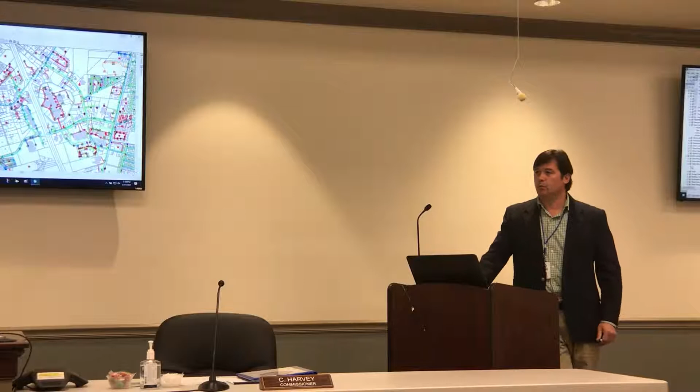I thought we were tying this person on to sewer also though. No sir, not at this time. I just thought- it's a water and sewer easement. We were able to obtain that from the property owners, both a water and sewer easement, but at this time it's only a water extension. Okay, my apologies on that.

Well, just a follow-up question for clarity. At such time 507, that's the closest to our gravity system, wants to connect, will they be connecting via gravity, or would they have a grinder pump?

They would have a grinder pump. Theoretically there'd be a 2-inch force main that runs parallel to the 2-inch water main that they tie onto. Because if not, they would have an excessively long lateral out in the public right-of-way. Understood. Okay, and then let's say 509 goes next.

Do we run the line down the right-of-way, that low-pressure system along the frontage of 509, at such time that they put in a grinder pump? I think that's going to be a new house, I presume. There's an existing structure down there, I can't tell if they're renovating or if there's an existing structure at 509.

Is this the drawing on the second sheet, Todd, that we're supposed to be looking at? We used a previously created plat as the exhibit for obtaining the easements for folks, so this is the only one related to Longview as far as the drawing. I've got GIS pulled up, so it'll help us get a better view. Let me turn on the ortho.

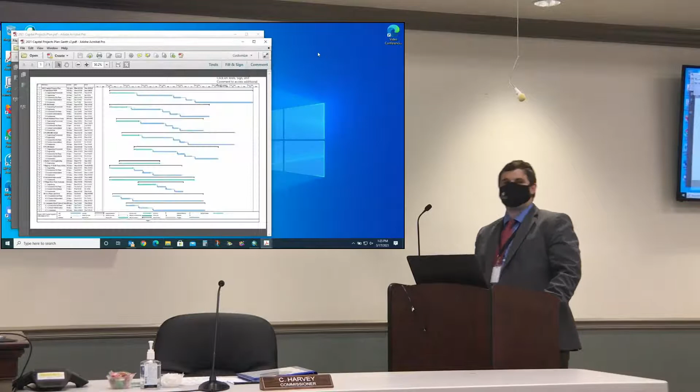Are we supposed to be looking at the new one or the old one? We're going to go over both of them, give you a lot of options today. I have a third option that's not printed on here either, so.

What was sent out to y'all last week, this is the draft capital projects plan for the 2021 year, starting with the fiscal year. The reason it's a draft is because we typically approve this concurrent with the annual budget. And since we do not have an approved budget for next year yet, these have not been approved. So, we talked about most of these at the retreat that we had back in January.

These projects are in a variety of areas. The budget, which will be presented at the Finance Committee meeting, currently has about $7 million in the R&R fund for next year. So down there at your bottom right, you'll see the R&R funded projects for next year would be just shy of $7 million.

Those projects would be to convert the Canal Road water production facility, the fire well, to a water production facility. That is right there by the intersection of Glencoe and Canal and Harry Driggers. We have been in communications with Glynn County for their proposed intersection project there, and this is being taken into account with their design. We would convert that from a fire well to a production well, exactly like we did with Ridgewood. That is an Upper Floridan well.

And we also have a great deal of demand currently ongoing. Do you need this email open anymore? No, no, you switch users. Okay, good.

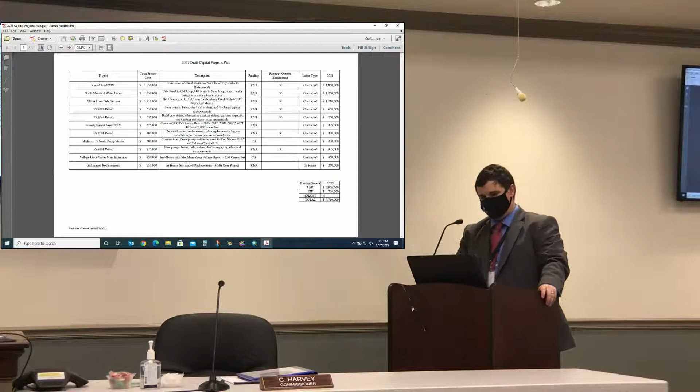If you're familiar with the exit 38 area, you'll notice every time we have a major water break there, we cut the entire exit off of water because it's not looped very well. It is single fed all the way from Old Jesup to the spur and up almost to Perry Lane Road. So if we have to shut a valve down, pretty much everything between the spur and Old Jesup gets shut down. The easiest way to loop that would be down Hautala, but that's a bit of a spaghetti junction with utilities out there right now, and you could theoretically jack and bore the railroad, but that's about a 600-foot bore.

Jack and bore costs right there, so that's about $350,000 to bore that. So the options we're looking at here are Cate Road to Old Jesup. Since you did me a favor and pulled up GIS, tell us where that line's going to be. I did not produce maps for all these because I was planning just to pull up GIS.

Can you provide a map that goes in the packet tomorrow? This is going to be in the packet tomorrow, right? No, sir, this is just for discussion today. Okay, it would theoretically be in your packet for approval at the April meeting.

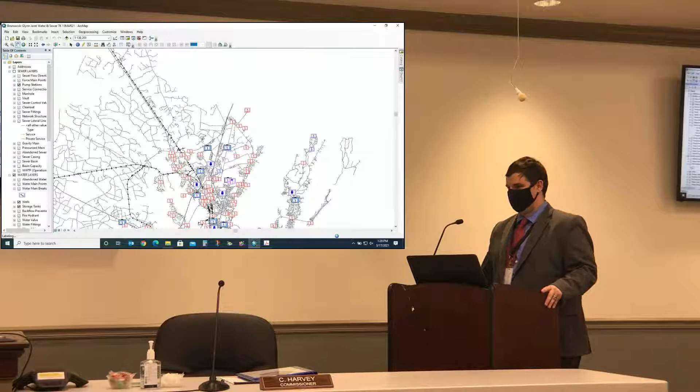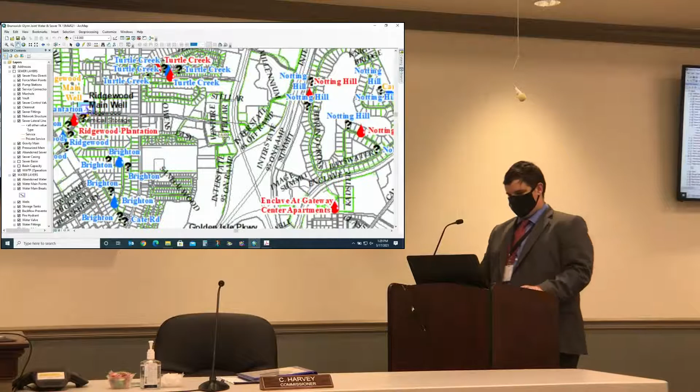So we're up here, let's zoom in on our exit. One of the sections we're looking at for looping this, as you can see, we have a line that comes across the interstate up here to our right and comes down through Millennium Park at the I-95 Toyota, but it is not looped to the other side of the spur.

So one of the loops we'd be looking at doing would be getting GDOT permitting to bore under the spur and loop those in there. Because if you look down here, what currently happens, this long blue line keeps following and then dead ends right at the railroad. So if there's a valve break anywhere back here, the closest place we can shut that off is back here, so we shut off everybody in between that feeds off of that line. Ridgewood has helped that somewhat, but we still have problems. The other area we're looking at is back behind the Tractor Supply, which I'll get to shortly.

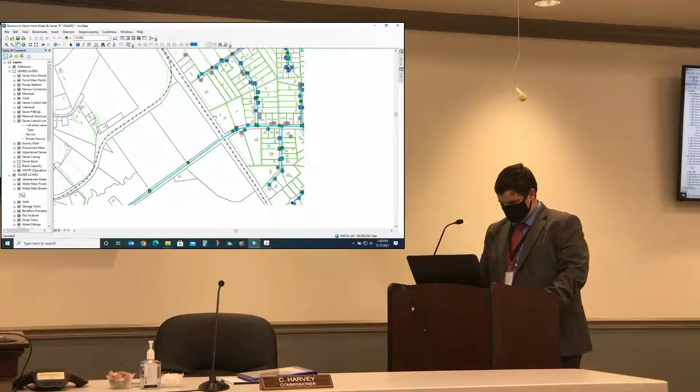Looking for road names here - that's 99, went too far. Some road names here, that's Ridgewood, Perry Lane.

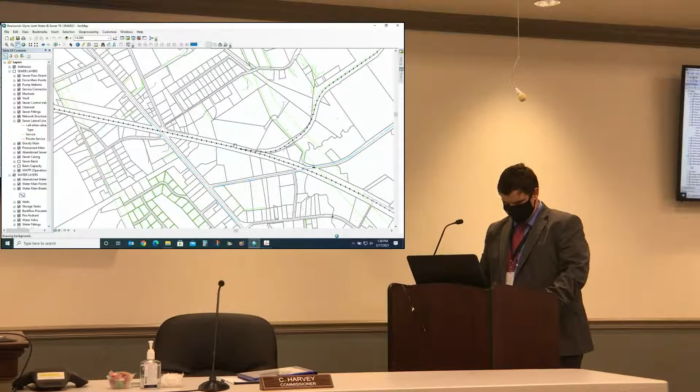So essentially, we would also bring a line down New Jessup, which is a 16-inch line - that's the one that comes in on Old Jessup. Old Jessup's a 16, 12-inch on Perry Lane. So we would be bringing a 12-inch line down Bailey and along Old Jessup to loop the system on that end as well, so it's looped on both sides, meaning if there's a break in the middle, we can feed from either direction.

So you have to shut the valve off, and the water's going to go around, it can go in different directions. Yeah, so those are the two we are looking at doing with this money, just to give you an idea. But that will give a great deal of water redundancy for the exit 38 area.

Is there any concern about right-of-way space on that section of Old Jessup where we would loop, behind the tractor supply area? It crosses a significant ditch over there. There's a bridge, so there's some constraint, some design, there'll likely be some boring with that project to get it done.

And then the other thing is, do we know of anything in the county's forecast 3 to 5 years out that they'd be doing some right-of-way improvements on? I'm not aware, we did just receive a list from Dave Austin from Glynn County, but I'm not aware of this. Matter of fact, I think they had done some work on this section a few years back.

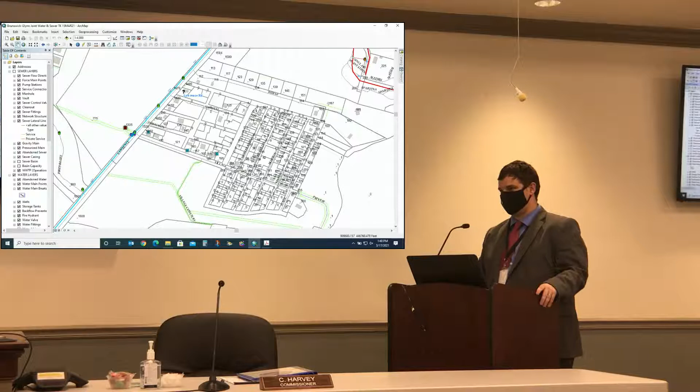If only one or two houses are on it, that's going to be pretty stale water. Right, but you can see theoretically these buildings that are in there and the number of vacant lots along Village Drive on these side streets. We'd be going from Lawrence back here to Wade and Virginia, the intersection there, with this line - so you could feed both directions off of that main as people came onto the system.

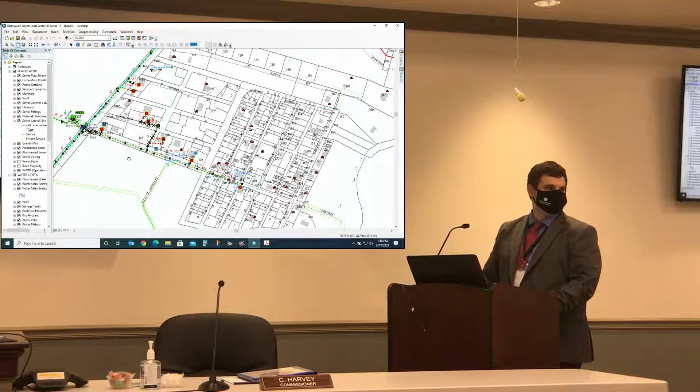We have gravity or force main sewer on Lawrence near that intersection - that's force main. And then there's low-pressure force main in Village Drive as well. There is a low-pressure force main going partway down - it stops here, I don't know the name of that street. What size is that? 2-inch. A single homeowner put that in to run grinder systems to their house.

And it crosses Lawrence Road? It does, it goes underneath Lawrence Road and ties in. Is that where the pump station is over there? Yes sir. If you put a bore underneath Lawrence Road with gravity, that'd be the way to extend gravity, but right now it's all running there.

So this would just be to add water service, it would not be running sewer service as well. My thoughts are, if we're going to cross with a water line, why wouldn't we just go ahead and put it in a sleeve? We could do that, give us that flexibility later, because we're in the neighborhood now.

How deep is that wet well? Very shallow - maybe 7 to 8 foot deep at 2056. It is very shallow.

Those pumps were in the process of replacing the panels to put VFDs in to keep them from short cycling, with the shallowness of that wet well.

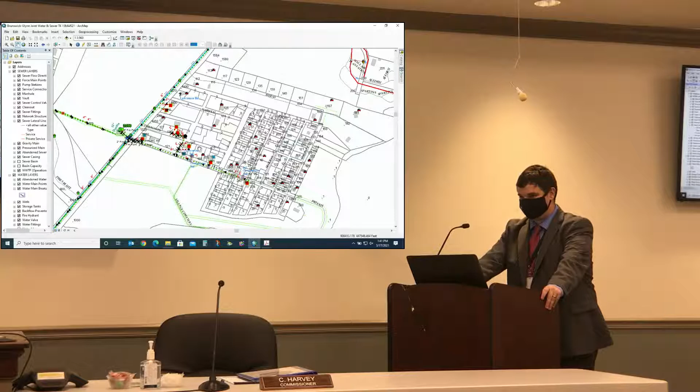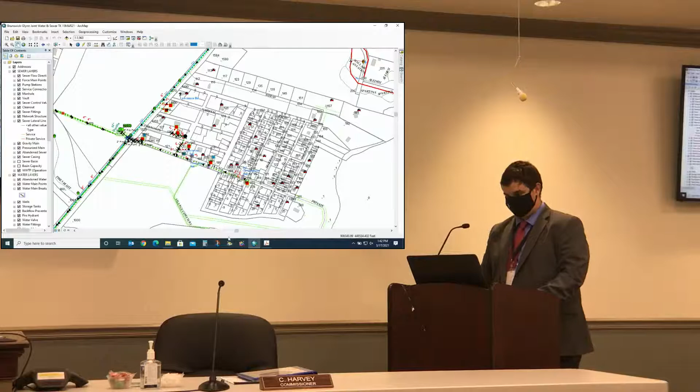Is that the pump station that Sinclair Plantation was going to improve? That's the one they would have been improving, yes sir. Is that project dead, Sinclair Plantation? We have heard nothing on that, so no progress.

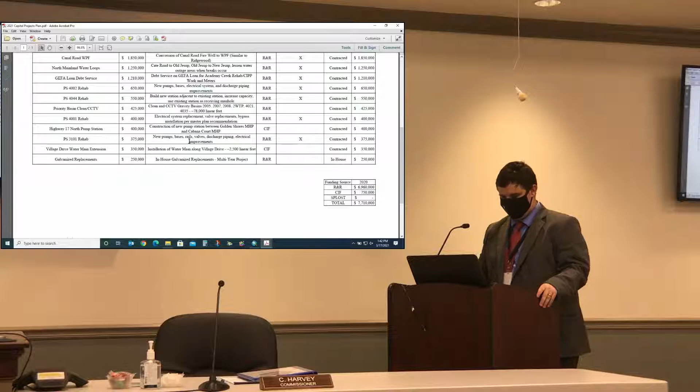The last project on the list would be to continue funding the galvanized project as we go through it. We've got about a mile of galvanized replaced thus far with that money. We're fixing to do some more galvanized work, so that'll hopefully be funded continually until we get through all the galvanized stuff in our system.

Now, I said the priority basin cleaning CCTV, we'll come back to that. That money was being allocated because we had $1.75 million worth of CIPP on the SPLOST list. Since that was unsuccessful yesterday, that project doesn't necessarily have to be expedited for the SPLOST list. We can televise those basins ourselves, so I have produced a new list.

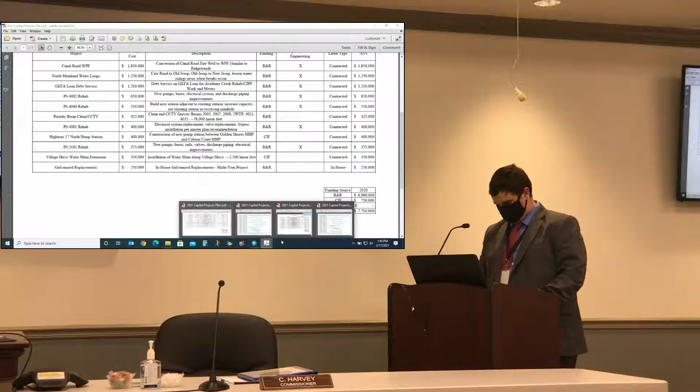You'll see a couple of fairly significant changes here. The main one is Dunbar Creek Engineering would be replacing that cleaning CCTV project. Dunbar Creek is in need of some rehab to the filters, the UV system, the aeration basin, the blowers, potential odor control improvements, and potential addition of a new clarifier. So that would be to do the engineering at Dunbar Creek.

For a reference point, the engineering on Academy Creek was right at $1 million, so that gives you a scale of the overall project cost. We're estimating 3.25 million for the project cost.

How long would the engineering contract duration be? Is that 9 or 10 months? I'm estimating 9 months. I don't know, Commissioner Trampsey, what your thoughts are on that, but I'd say 9 months.

So if we let this one in the second half of the calendar year, then we're looking at basically summer of '22 for the potential to have the construction results available. And then we'd look for funding to begin the capital rehab there. That's correct.

And then the other two, as you see at the top on the SPLOST list, we had the ARCO Community Road Water and Sewer Extensions. You see in the funding column there's both capital and CIF. If you remember from our finance reports, there's a capital reserve fund separate from the capital improvement fee reserve fund that we fund at $300,000 a year. There's currently, by the end of this fiscal year, $3.4 million in that fund. So 4 months into next year, if the budget is approved, we'll be at $3.5 million.

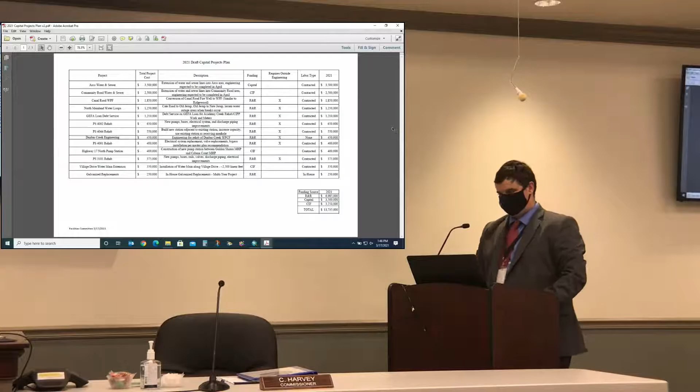Okay, well I think what we need to do is look at a few scenarios there and determine what's best for us, and then also plan an exit 2 years out—for example, paying off that debt.

If there's a new SPLOST or another funding source available 2 years out, actually it'd be about almost 30 months by collection. So I think that's reasonable that we look at that. It gives us the flexibility to keep on track our major capital projects that are going to benefit the community.

Yes, sir. And if we took that approach, the original capital plan that was sent out last week, we could still do those projects plus the SPLOST projects with the loan approach. So that clean and CCTV project would still be a good fit at that point, because then we could clean and CCTV all those lines and then use the loan money to actually fix the pipes. Agree.

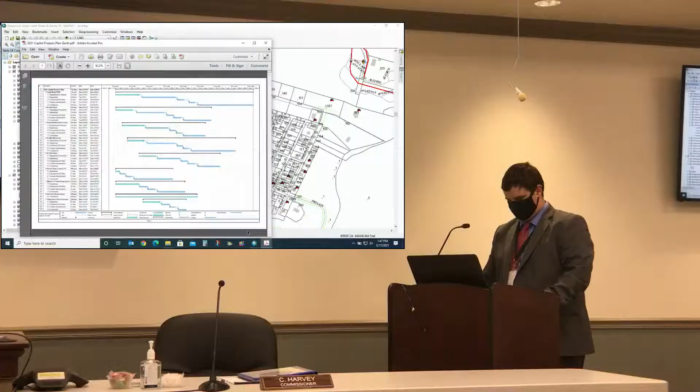So I also threw some timelines together for you just to give you an idea. Some of these are a little longer projects. I was a little conservative with this. I will give you fair warning on that.

But so the capital projects plan for Canal Road, you're looking at, if we started, Monday the 19th is the Monday following the April budget meeting. So that's where that date came from. So to go out for RFP, review the numbers, and come back to a commission meeting for approval for an engineer, you're looking at August getting that back, just because of the way the calendar falls. I assume 6 months engineering on that project, and also 300 days, because that's what the last contract was for construction. So that would be finished up April of '23 if that schedule is correct.

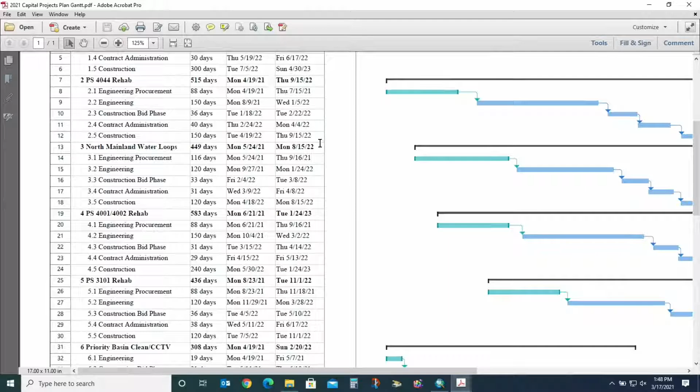So, it's one of those, when you look at it, that's not going to be a short project. 4044, you're looking, if you started that one in April for engineering procurement, looking at September of next year before that's finalized. The water loops, a little bit shorter, August of next year.

4001, 4002, my recommendation would be to put those together into one contract because they're very near each other. And they do pump to each other, so rather than having separate engineering firms work on that, that would be a little bit longer construction with both pump stations being rehabbed there. So January of '23.

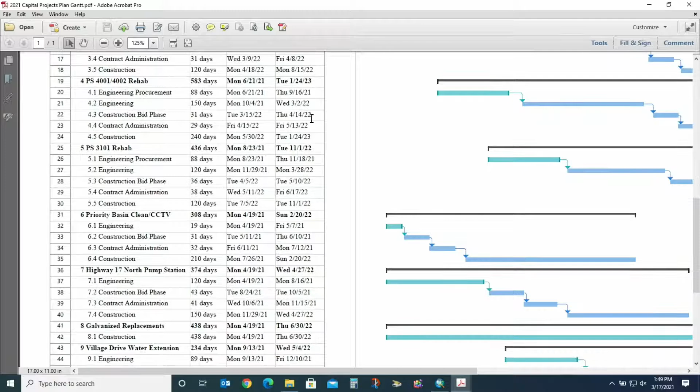3101, we would start 3101 maybe a little later to give us some time to space out some of our workload a little bit. So that it's a shorter duration project, but because we'd be starting it this fall.

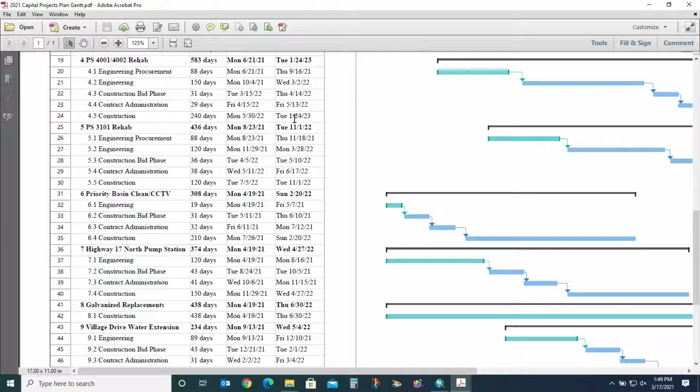Clean and CCTV, we got specs prepared. We can put out a cleaning and CCTV contract very quickly. It's just literally getting maps made up, adjusting the specs just a little bit for the existing project. We could have that advertised very quickly, within 30 days.

And let me ask you this. I think I saw somewhere, I don't recall, that we were forecasting about 78,000 linear feet for cleaning and CCTV. What's our capability in-house on an annual basis? We do about 100 to 150,000 feet in-house a year.

Wow, okay. And this other 78,000 would be on top of that? That's correct. The thought process when this project was put together, they will get 78,000 feet much quicker than we can get 78,000 feet done. Understood. So when that was on the SPLOST list for the CIPP, it was to get these basins televised as quickly as possible so that we could turn the SPLOST money over.

Understood. Okay, thank you. And then if we started in-house engineering on the Highway 17 North Pump Station, I allowed Todd 120 days to get that one done. The only work on that project. And then, that's 120 working days.

Yes, okay, that's not correct. Weekends are included. So that would be in April of next year, finishing up. Galvanized is just construction in-house, so that would be through the next fiscal year.

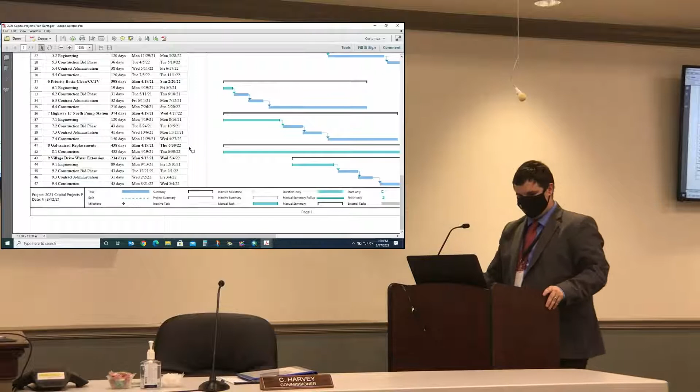And then Village Drive, the first one, again, that would be an in-house design, pretty straightforward to get that one done. And then we'd be finishing that up next spring as well. So that's if the first plan were to come to fruition.

The second plan, I'll just talk about the projects here that got added. Dunbar Creek. Depends on how we want to do this. I said 7 months as an estimate to get that done. May take 9 months, depends on, honestly, how much is included in that.

And then ARCO and Community, again, that'll be ready to bid in May. So we may stagger the bids a little bit so they're not both taking bids at the same time, but we'll stagger them a little bit. But those are going to be, ARCO's probably a year-long project, and wouldn't you say, Todd, to get all that installed and all the paving work and everything redone back in there. And Community Road, I assumed 9 months to get that one done. That's about 2/3 the size of ARCO. Yeah, it'd be easier.

My thoughts are we may want to flip those in terms of timing, simply because the scale of ARCO is significantly bigger, with all the paving involved. And frankly, the subscription rate may be lower in terms of folks wanting to connect sooner compared to the community road area. I think both are viable projects and worth doing, but I would suggest we just flip those in timing.

So certainly that could be done. The start date on all these, depending on priorities, are flexible.

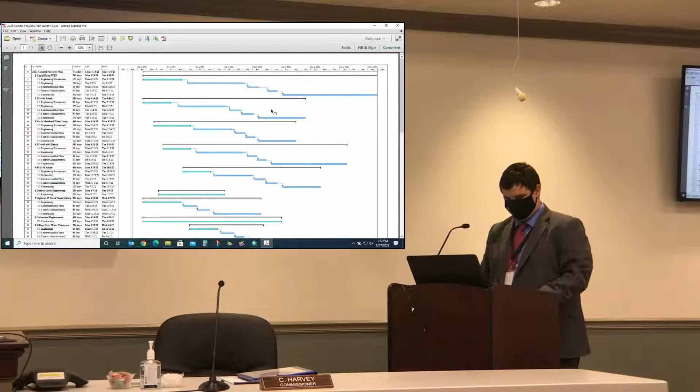Another thought, we've got a lot of engineering going out the door requiring outside resources. I think it would be beneficial for us to look at doing some of it internally and staffing accordingly. I think we need more of a mix of what we outsource compared to what we insource, and right now we do a lot of work outside.

My thoughts are we could probably be more responsive to projects of small to medium scale, for example, not getting into the complexity of treatment plants per se. I just think it's going to give you more flexibility to be responsive and control the cost and the quality. That's just my view, is to look at it.

The other thought is what we're not seeing here is a lot of the stuff that's in our update of the master plan. We've got a lot of these blue lines, which are construction, that are stacking on top of this. So my other concern is our bandwidth total, because we're the construction management organization, if you will.

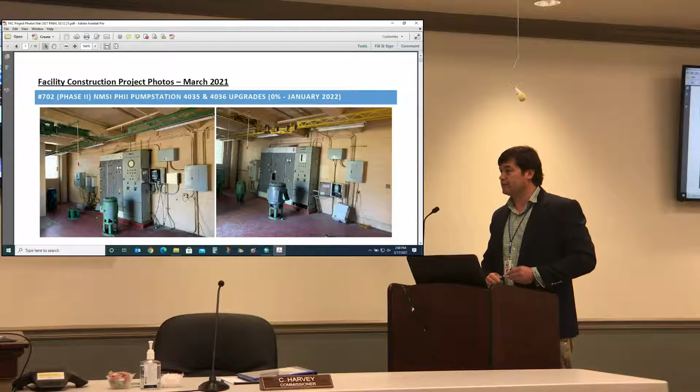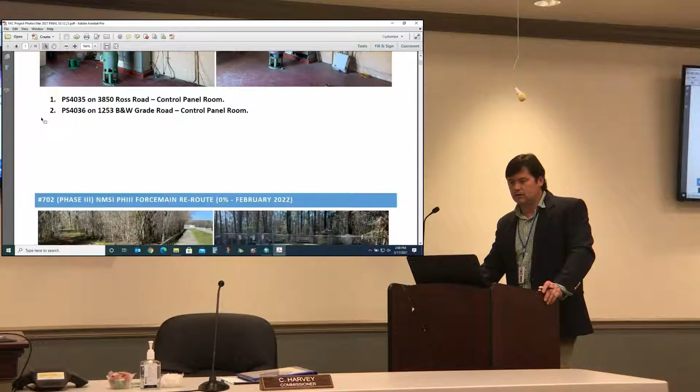So it kind of helps you track along there when we think we're going to finish the project up. I thought that might be helpful. It is. Pictures of that, just inside again, that's a 35, pump station 35, and then 36 stations are coming along. Looking forward to getting those underway. The notice to proceed date March 22nd, coming up very quickly on those.

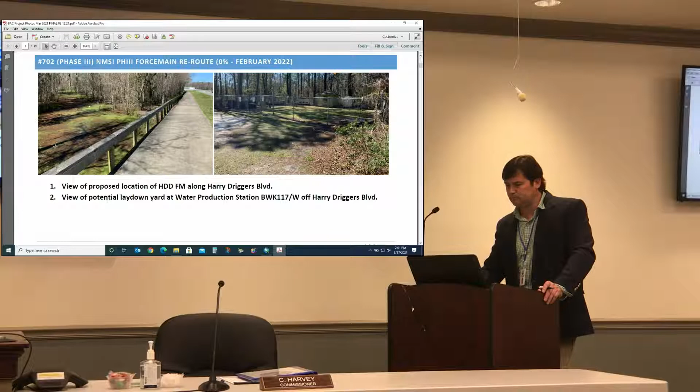Monday, correct. Next project, in tandem with that one, separate contractor, is the force main extension down Harry Driggers Boulevard. Also looking forward to that one kicking off - or it's already kicked off, but looking forward to them mobilizing as well. Notice to proceed on that one's April 1st. In the pre-con, they mentioned urgency in getting these materials ordered.

So materials costs are very volatile right now. In one direction, it seems to be to get hands on them is tough - some level of supply chain issues with PVC right now. My understanding is there's 3 resin plants in the United States, and only one of them is actually producing resin right now. So PVC becoming a little more difficult to get, especially when you're trying to get 3 miles of it.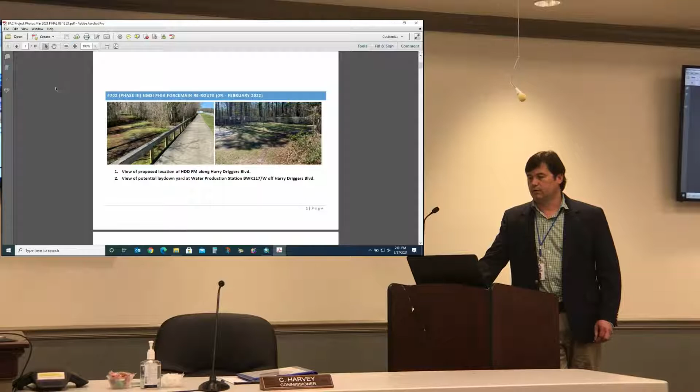So they did ask us about purchasing and whatnot. They're doing everything they can to secure everything for us and get it going. Next project, 703, Pump Station 4003 upgrades - again, that project's around about 60% complete. April of this year, or April 21 completion. They're getting pretty tight on their schedule there.

A couple things - looking at the quality of the work's good. Scrolling through here, you can see their structures on site for the gravity segment's going to begin being installed. We got the right-of-way permit finally in hand. We should start seeing them digging that. They do have 30-inch gravity on site though, so we did get that PVC.

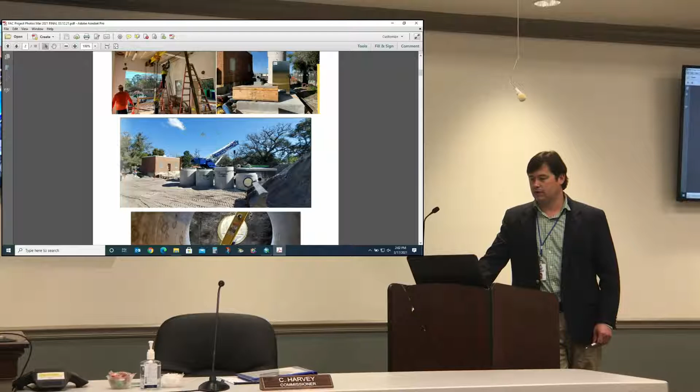Yeah, so what you can't see in this picture, but has since arrived, is the 30-inch PVC for the gravity system, the gravity, couple manholes that are part of this project. And you'll see digging going on - they're already starting to put their well points down to dry it up for the excavation. The picture at the bottom of page 2 there you see is a look through from standing inside the dry pit. I took that looking through the dry pit, through the core hole. You can see the wet well on the outside of the structure, and that is an annular space in between the two. It's now since been backfilled, but that is where one of the suction lines - the third suction line hole that penetrates and comes into the dry pit where the pumps are situated. So that's looking through there.

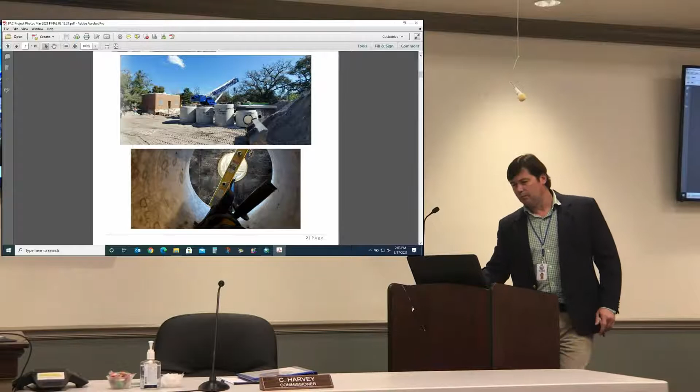I'll be talking a little bit more about that here in just a second. If you scroll to page number 3, this is something you never want to see. In a dry pit, it's supposed to be dry, but you see some water in there.

Mr. Patel made a site visit out there last Monday and noticed a good bit of water standing at the bottom, and quickly inquired as to what happened. That is groundwater that made its way from outside the dry pit station in. So what happened? Well,

When they leave for the weekend, they typically turn off their dewatering on the outside for the wet well. They did that just as normal. The suction lines that come from the wet well into the dry pit had some fittings that weren't able to be completely tightened, and they were left loose. They figured the little bit of water that would trickle in through that wouldn't be a problem. The sump system they had set up to accommodate any water that got into the dry pit, they assumed it would have no problem keeping up with it.

That sump system inside the dry pit was a series of two sump pumps, daisy chained up to get the water that height out of the ground and up outside the dry pit area, or the station. It failed on them, and so it filled up with water over the weekend, and that's what we had. This picture at the top of page 3, the water was actually a good bit higher than that. If you look at the picture below, you can see the witness mark, the mud line, the darker shade. That's not paint — the paint is supposed to be white, but you can see the stain that shows the depth of the water.

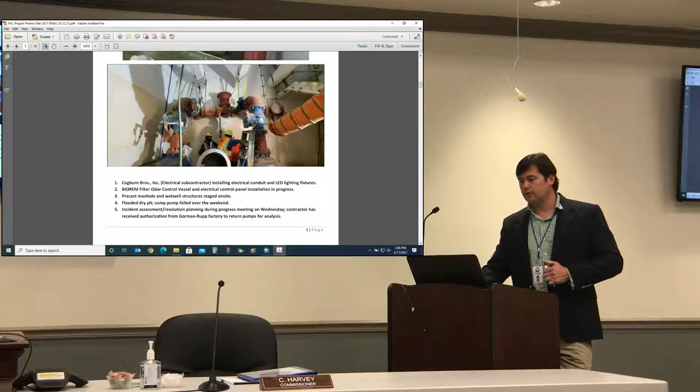So the contractor is fully taking responsibility for the incident and addressing it. We've had a lot of conversation with them recently. Any questions on that? I'll open it up to any questions.

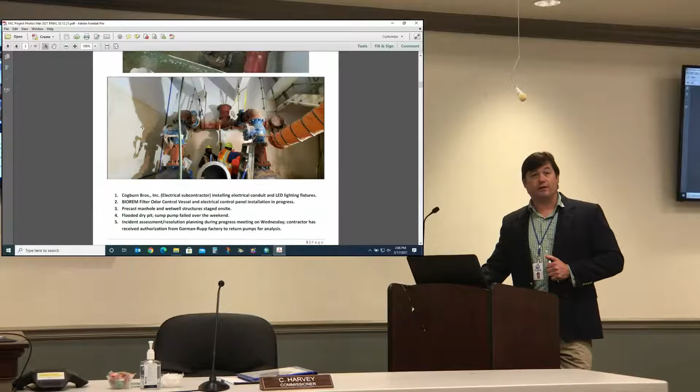Okay, moving along — Canal Road to Glynco 12-inch water main. Of course, construction-wise, nothing's been accomplished on it yet. As far as construction, it hasn't begun yet. That was an in-house design project.

Currently, water distribution is gathering materials. They've already taken an inventory — we've got about 2,500 linear feet of pipe on hand that we're going to use in this project, left over from the previous project. We have to order the balance of the pipe, and Mr. Simmons is in the process of doing that. There's also a section of that pipe included with the SPLOST project being paid for out of this budget that will be bringing it down Canal Road. Correct.

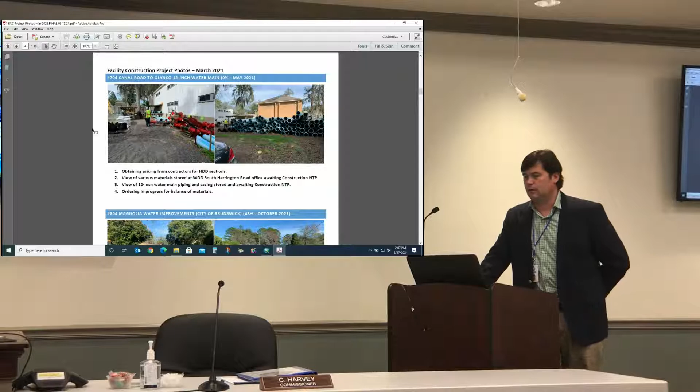That is tying into that project. Magnolia water improvements. We were told the underground contractor working for the city, this is a combined city and joint water project, city being storm drainage and roadways.

The underground contractor had been focused on storm drainage over about the last month. We were told they were going to begin back on phase 2 of the water on March 22nd, but they actually started back on the water on Monday. So our phase 2 of water is back under construction.

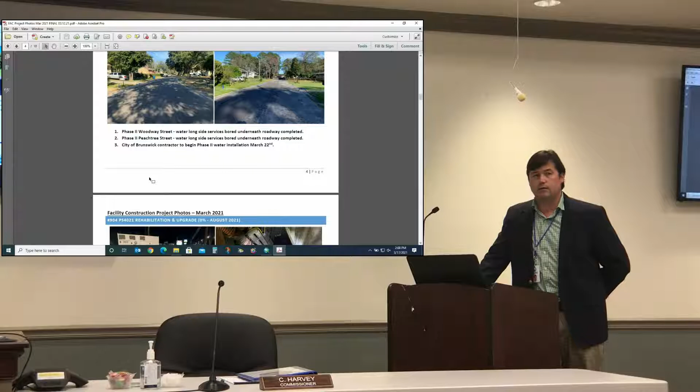Phase 1 customers are reaping the benefits of that, and I think we've had really good install as far as the water goes, joint water's portion of it on phase 1. All of the customers in phase 1 have been tied onto the new system, so all of those new services have been tied on and everyone's using the new system.

Next project is 4021, pump station rehab and upgrade. Last we spoke, the contractor had some pump delays since the pumps were coming over from overseas. An update on the pumps: now it looks like we're going to get those a little sooner, around May 1st or the first week of May.

The contractor is going to mobilize within the next 2 weeks, get bypassing on site. You can't see it because it's a still shot on the right at the top of the page, but one of the discharge lines inside the well actually has a good sized hole in it. So right now operations can't run that effectively because it simply blows water right back into the wet well and you're repumping it. Doesn't work well that way.

So timing is great on this project. The contractor understands that and they're going to get on site as quickly as they can, take our bypass pump out, get theirs installed, and get it going.

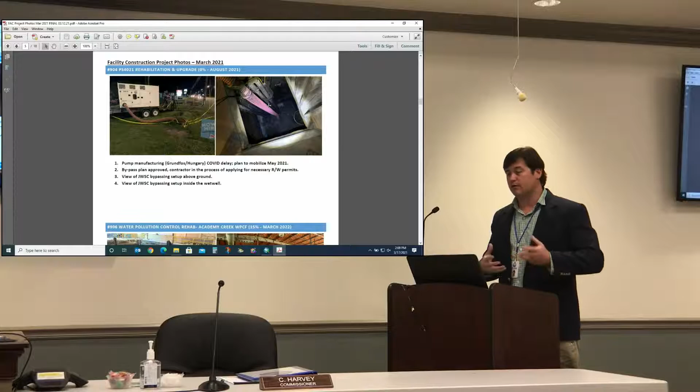Water pollution control. Our large project out there at Academy Creek just had the monthly meeting yesterday. On the picture on the left, they've completed the excavation for the sludge offloading facility. You can see them tying steel there. They have now poured a slab in the bottom of that.

Apparently it was a little bit of a trick to get the concrete trucks back in that building to actually pour that slab, but they were able to figure that out.

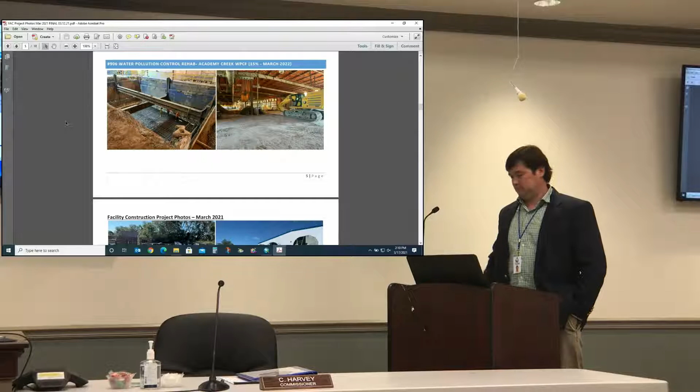Moving over to the next page, you've got the filters. They poured the slab for the base, and they've also started forming walls and poured one of the filter walls. So essentially what they've been doing for the last month is tying steel and pouring concrete. Some large new structures going up out there.

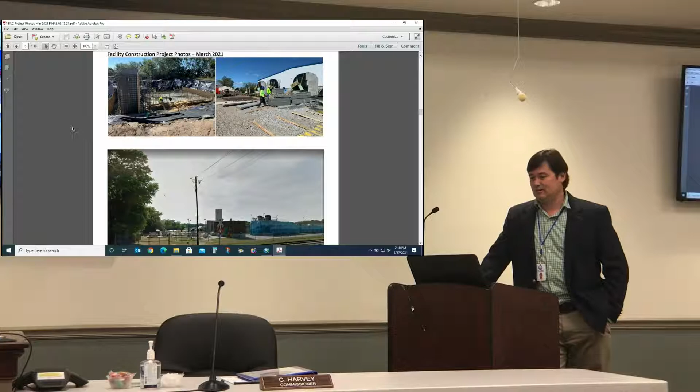The excavation on the influent work was originally scheduled again for next week. Found out yesterday they are going to start that April 5th. They had to have their pipe crews come in from out of town, and they got delayed on another project. It is not going to impact project completion because that's being done by a completely separate crew than who's doing the rest of the work.

But they are moving right along with that project. Things are going well. We get inspection reports from our engineer of record, and things seem to be moving along quite well with that project right now.

Said it right, with a lot of steel. There's a lot of steel down there, a lot of steel, it's pretty impressive. You've got the filter structure in the back right now, and the excavation in the building for the receiving pit's pretty impressive too.

All right, pump station 4036, basin expansion, force main reroute, CIPP, it's out for bid right now. Just the CIPP portion of it. This is one segment of this gravity sewer rehab that runs underneath the exit 36 overpass, and several other segments in that area in the 36 basin, so some critical gravity sewer rehab going on there with that one.

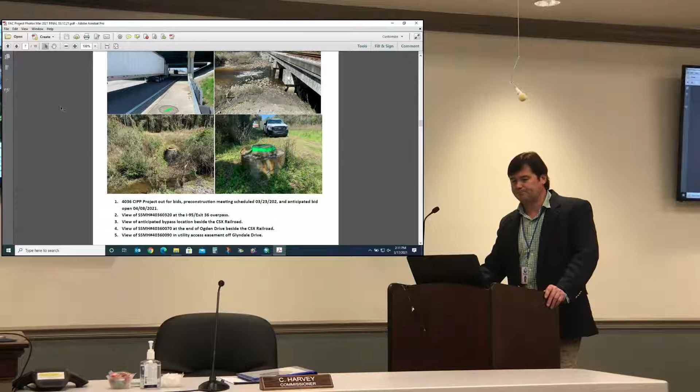Hopefully we get some good bids in on that when they come in. Next project, 2002 Altama Avenue CIPP.

We're trying to wrap that project up. It's down to the project as far as the segments go, there's one segment left to line. It's under discussion whether to continue to pursue that one or not.

But here in these couple photos, this is IPR, who's our prime contractor, has Capital City, who is their sub, coming in doing this specialized defect removal, which is punch list work. When you slip these liners and invert them inside, they're loose, resin impregnated felt essentially. You're doing this all with the hopes that the thing inserts and inflates correctly inside the pipe. Occasionally you have a ripple in the liner, that kind of thing, or a rise or something.

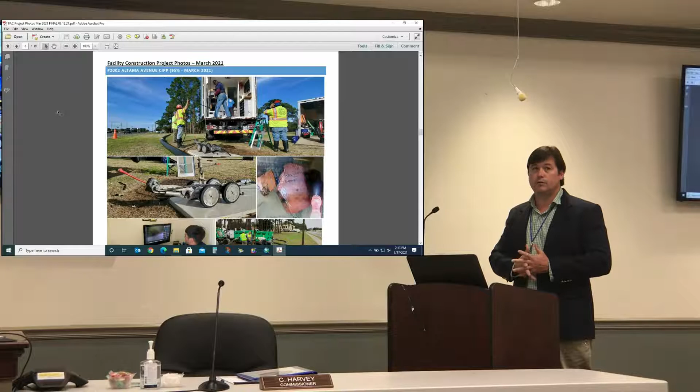The way to address that is you send a robot in, you remove that defect, and then you go back in and put a short liner to bridge the gap. And that's what they're doing here. It was right here in front of the college, pump station 4006.

There was a defect such as that. Capital City, now the interesting part of this work, Capital City mobilized about two weeks ago, began the work, got their camera, unfortunately got hung up in the defect about 400 feet into the pipe. So they tried for about a week to get it dislodged, and this whole time that segment of gravity is in bypass.

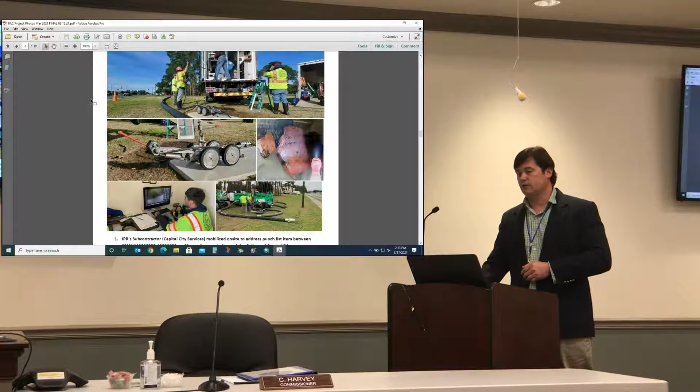You can see in these pictures looking northward, and that's Altama to the left. Looking northward, you can see that pipe. That is the bypass pipe that's pumping the wastewater to station 4006.

That's a picture of the camera that got stuck there on the front, that red portion. That's the wand, or the actual cutter head. It's a water jet.

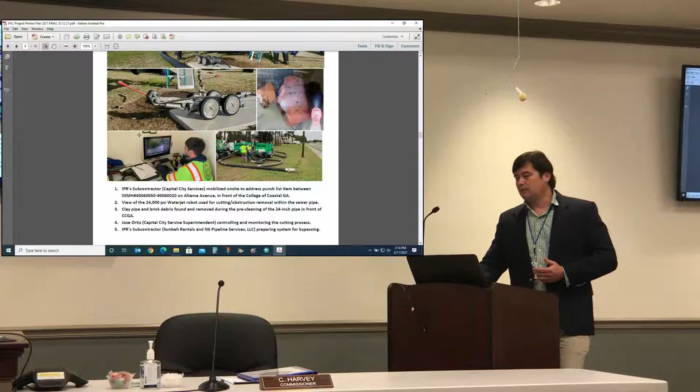Hits it out with such high PSI that can actually— He got caught on that broken pipe. No, sir, that's a piece of the pipe, that's VCP pipe actually right there, as you can tell, and I think there's a piece of brick off to the side. We're not sure if that came out of the defect or if that came from upstream.

Once you line these pipes, they become slick. We think the camera got caught on the fold in the actual liner. Yeah, I've got a picture. Matter of fact, since we're talking about it, let me jump down to it.

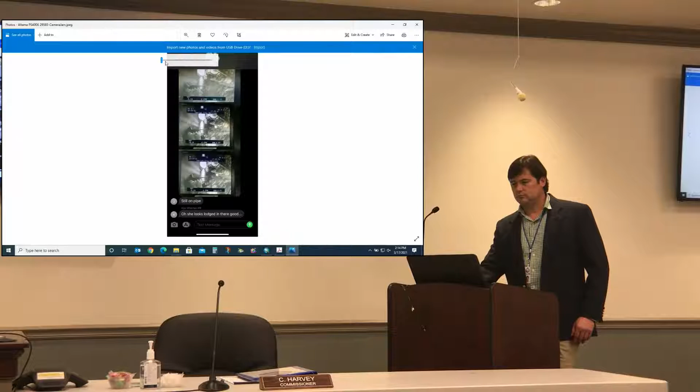So what's that defect doing in there? What's the pipe doing in that line? That's a line pipe, we've lined it. It was from upstream. Obviously, when we jetted it previously, it pushed it down into one of the segments that wasn't being lined, it settled out there, and then when we got the flow back to it, it pushed it back down. So that was likely from one of the upstream segments that got lined.

So when they cut out a defect, and you say put in another piece of the liner, is that like putting a stent in there? It is. Exactly, exactly what it is.

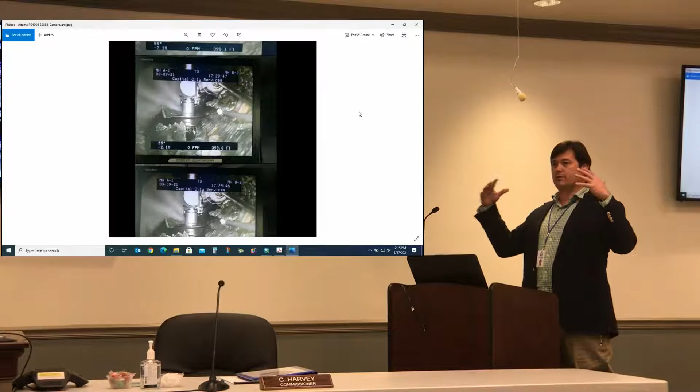And then they used, what do they use, hot water to cure it also, just spraying, surface spray, or? Since it's a short section, when they mix it on site, it's reacting. It's just a 5-minute epoxy, they gotta get it in place. They have a little bit of working time, but they get it in place, they inflate the plug, it spreads it out, presses it hard against the host liner, and then it cures.

Okay, so this is a picture of the camera actually where it's stuck. Unfortunate accident, these things happen. But here's the defect they were cutting out, and it's kind of difficult to see. This is the camera itself, and its wheel actually dropped down into the defect. And we think probably where the pipe, just what we were repairing right there, the host pipe was fractured. The wheel dropped down into the fracture and got hung up.

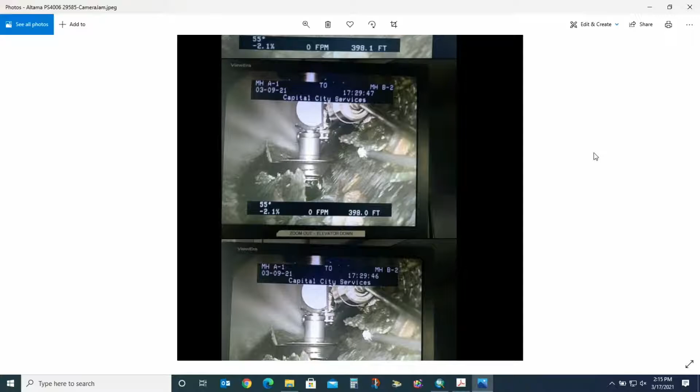They have tried everything coming both directions, hooks and all this kind of stuff. And you think, man, just hook it to the bumper of the truck and pull. But that's some expensive equipment down in there.

So it was 400 feet in, you said? Yes, approximately. Wow. Well, it's about 35 feet from the other end. They almost made it, huh? Just can't quite reach it.

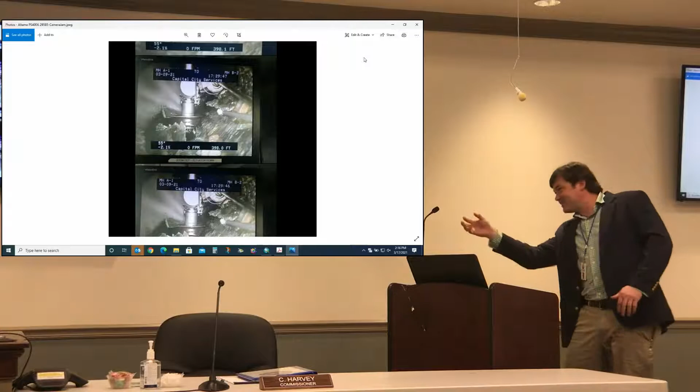But unfortunately, when you have to go in one way, and since we're right here, I'll show you. This is what Capital City decided as a solution, using industrial divers. So it's not really a diving situation, it's more of a supplied air situation in a confined space, because you can imagine this 24-inch diameter sewer pipe that these brave souls are inserting themselves into.

So you can imagine this is highly specialized work, you've got to know what you're doing. Everything was vetted very carefully, albeit they are Capital City and JPR sub, not our sub. We are not contracted with them, but we ensured that we had sufficient right of entry documentation and hold harmless agreements, and we're also named on their insurance. Our legal folks are very satisfied that this type of operation is going on.

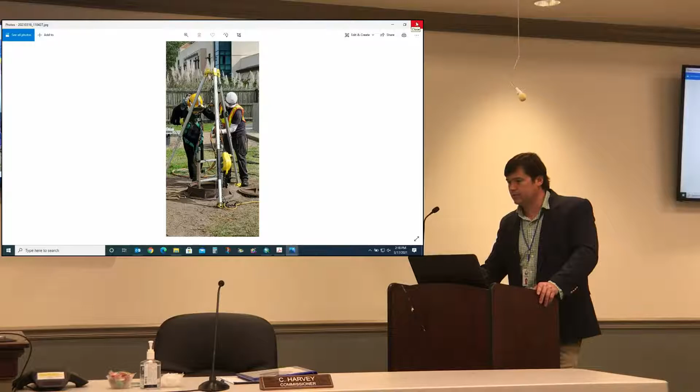But anyway, sometimes there's not much other way to do it. Things don't always go as planned, that's very true. It happens, it's how we react to it and how we handle it, learn from it. But you're satisfied with the reaction from the contractor then? Absolutely, and they made the call to do this. In fact, we slowed down their reaction, making sure we had everything we needed for them to go in that line. They were ready to go in there end of last week. So that's one thing about this job, you learn something new every single day. You feel bad for these guys, very professional outfit, just stuff happens.

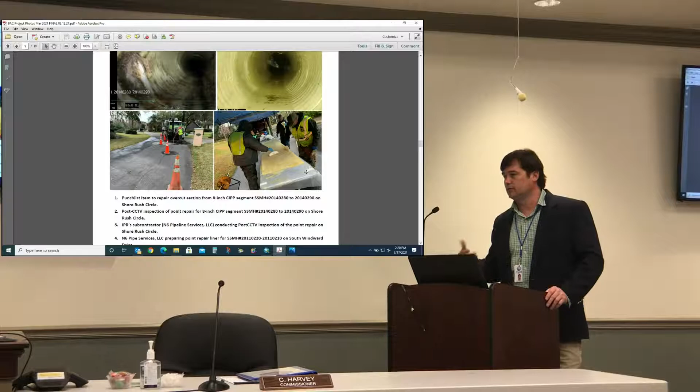Much better situation with the final result there. And to answer your question, here's a good picture showing that. That's how they're mixing the short liner on site. They mix up the resin, saturate it on site, put it on top of their plug, and draw it through the pipe to do their stent. Interesting process.

Coastal Club Apartments 4059 is the next project, 2005. That project was incorporated into a comprehensive agreement. As part of that, 4059 was going to get upgraded by the developer. They were going to handle all the contracting directly with the contractor to do that. We understand that they are signing the contract with them and looking for a mobilization date from those folks. But that will be wrapped up, we're assuming, by August here. Should be sooner than that.

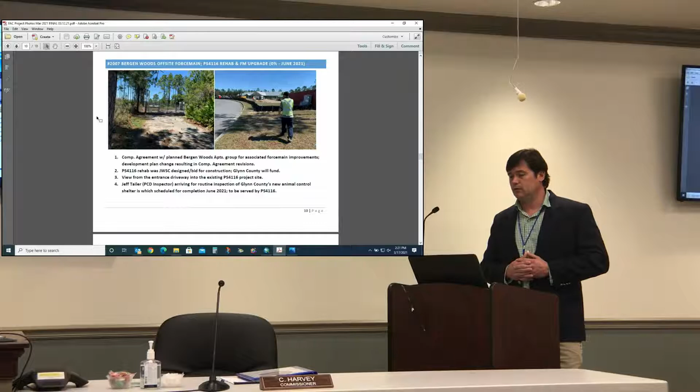Bergen Woods, off-site force main. We tied that one to the pump station 4116 rehab, which is out for bid right now. We just had our pre-bid meeting yesterday. A handful of contractors, 6 or 7 prime contractors were in attendance, so they seem to be interested in that project. Hopefully we'll get a good bid on there.

Of note on this project is that this will serve the safety complex, Glynn County Safety Complex, multiple users in there, GDOT, everybody else. But what is under construction now is Glynn County Animal Control, so they'll be served by this pump station as well. Theoretically, at the April meeting, there will be a MOU brought forth where we will manage the project and then bill Glynn County for the construction that's ongoing, similar to the way Glynn County does East Beach and Demere and the village project for us last year. This is our specialty, not theirs, so we'll do the pump station work and they'll just pay for it.

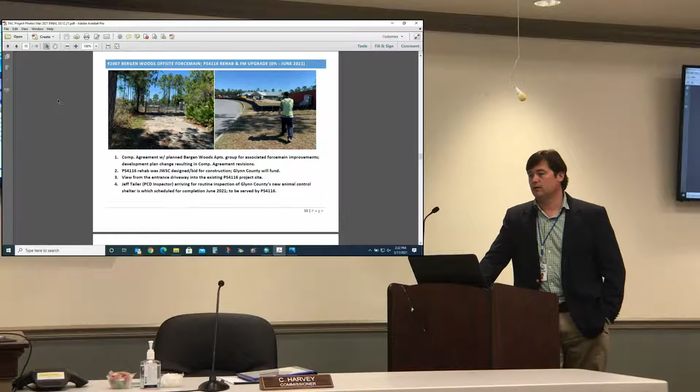Another project designed in-house, this pump station was designed in-house. Glynn County provided the survey work, so it worked out pretty well.

Sea Palms East Waterline Rehab has not kicked off yet. I know distribution is coordinating to do that. He's getting pricing on boring underneath Frederica. Correct.

Oak Grove Force Main formerly had 4182 pump station improvements to it, but will likely just manifold. That project, they're still going through their permitting on the actual construction of those residences, but as part of that, they have a comprehensive agreement with Joint Water to run the force main to serve that development on Oak Grove Island. So we've been through several iterations of design review with them.

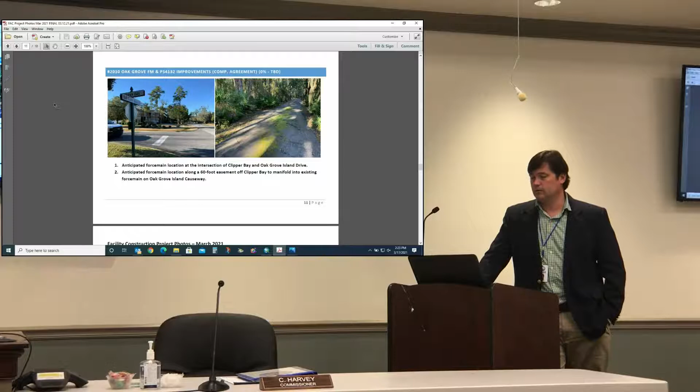Prince Street elevated storage tank. And after this, we'll talk about Demere. So if you've come over the bridge, you've been downtown off Prince Street, you probably noticed the curtain hanging around Prince Street elevated storage tank. If you wonder what it is behind the magic curtain, that's what they're doing. They're blasting it down to white metal, bare metal, prepping the surface for repaint. And they're done with the blasting now, priming almost complete. Inside the tank is blasted and primed, and they're going to wrap this tank up pretty quickly.

This one's going to get the logo, the city logo. The city chose the logo that's going to go on there, so coming over the bridge, you'll off in the distance, hopefully, be able to see that pretty well.

They've got some tight inspection on there from one of our junior EC inspectors, expanded the staff there. That's a special request when I get to pick Mr. Klein up from school. He wants to go around and see what's going on with projects.

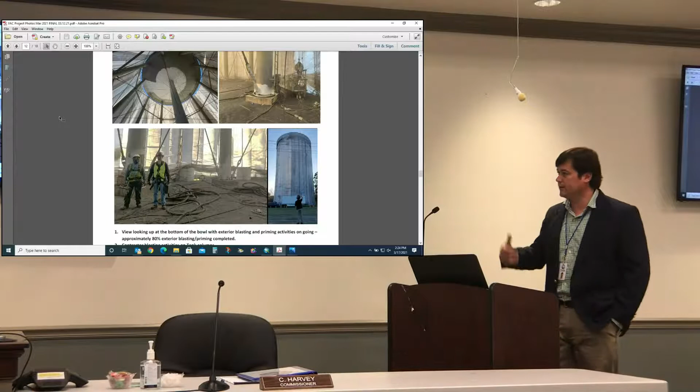Any safety issues at the tank at all? No safety issues. Thank you for your remarks when this project kicked off, and from your previous experiences we hammered that home with these folks. And we have seen no safety issues. They have pretty good practices. They meet before they do anything at the beginning of the day. All appearances, yes, they're operating safely as far as we have seen.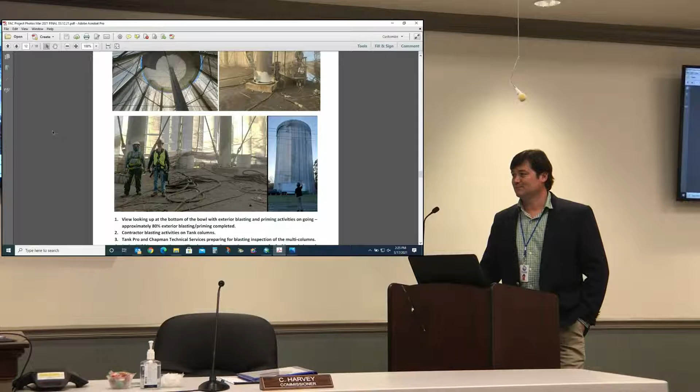Any feedback from the neighbors? Zero feedback from the neighbors. Kind of wondered, because that's on a small lot right next door to a couple of houses. I think the contractors have done very well with their staging, their lay down. They've executed well. The neighbors aren't complaining. We have some very good neighbors out there, very understanding. Well, they're probably waiting for the unveiling, so.

You'll be happy there. So, in tandem with that project is Demere Street, on St. Simons elevated storage tank. That one is underway now as well. They mobilized a second crew, same contractor, mobilized a second crew over there -- big deal on that. They've already done the pressure washing on the outside. They're blasting and priming on the inside now.

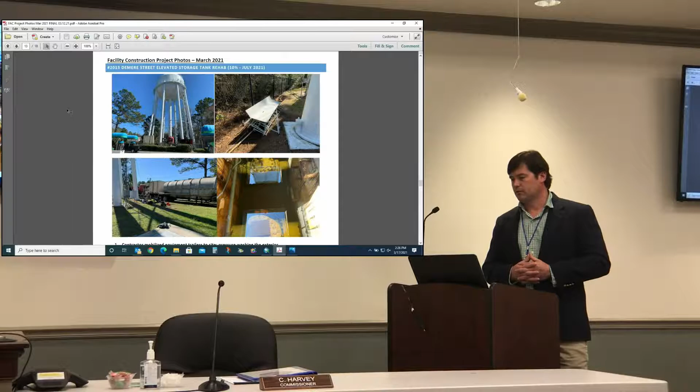Now, they're not going to hang a curtain on this one. They're going to use a paint system called dry fall, and it's just a type of paint. By the time it sprays, any backsplatter or overspray dries within seconds, so it just simply falls to the ground. We're waiting to see how that goes, if you get drift or anything like that. But anyway, it's an industry standard type paint. If they were to blast this one, they definitely would have hung a curtain, but it's a good thing with this because there are antenna -- we do lease this out for antenna space, so with no curtain it works out well. So that one is underway as well.

Force main replacement for 2002, engineering's just about done. I'm expecting to get the 90% in this week, first of next week. And we have located the exact connection point. So we will have to open cut Demere to make the tie-in, so that'll be night work. But moving along pretty good there.

Going to be slow -- it's 1,300 foot of pipe. That sounds like it should go pretty quickly, but they're going to have to open cut the whole way through, and it is very tight along Arnold Road. So it's going to take a little longer than it may seem it should take to put 1,300 foot of pipe in the ground. Presumably, they're going to plate it most of the way, either that or dig a short section and backfill it every night.

We looked at boring it, but there's so much in the ground right there, we figured we'd rip more stuff out of the ground trying to bore it than we would trying to open cut it.

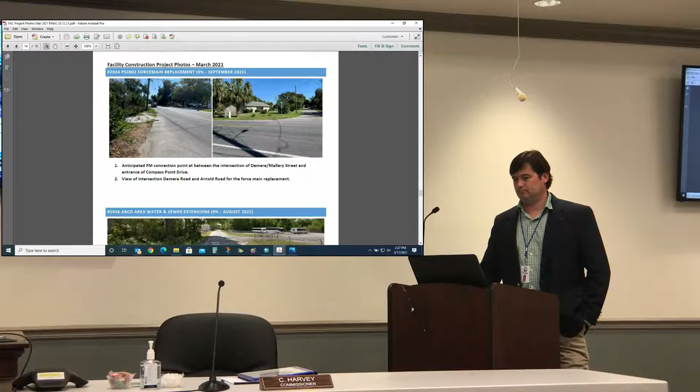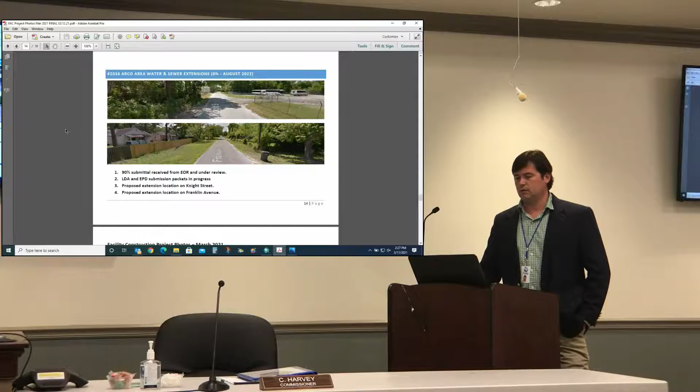About Arnold Road, when we're actually on it, you may want to have some discussion with them about their stop work at the end of the day and how they leave the site, particularly approaching the 5 o'clock hour, because that's kind of like Restaurant Row right in that area. It gets really congested, so just thinking of safety of the workers, equipment, parking, and that sort of thing.

Another thing we've got to consider is, depending on when we accept bids on this project, we're going to have to not work during the major holiday weekends to avoid causing significant disruption. So it may be a little bit of a start-stop project.

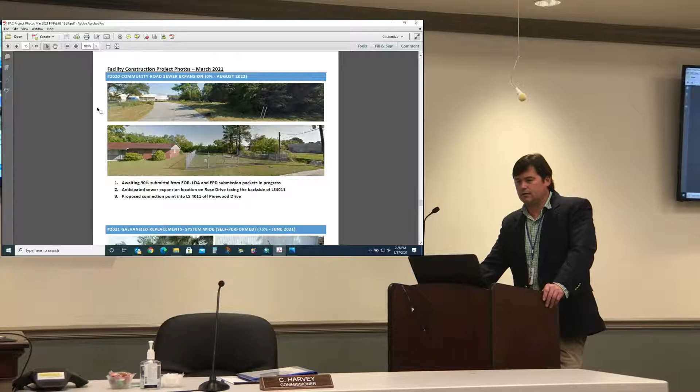Okay, after ARCO, Community Road sewer expansion. We did get back, I believe, since this update was written, 90% with under review on that, so a lot of interest in this area, obviously commercial. And we're looking at the funding for construction.

Galvanized replacement, system-wide, self-performed. You can see some of the good stuff coming out of the ground - some iron pipe there, and you can see the big pile of iron coming out. What's the largest size of galvanized pipe we've replaced? 2 inches, the biggest we've replaced thus far.

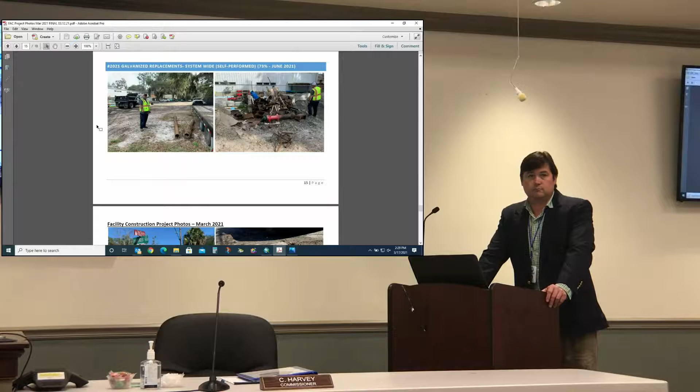Are we replacing some of the service line to the meter also? We are replacing all the service lines to the meter that are tied to the galvanized. They're putting all 1-inch services, aren't they? All 1-inch services, even if it's a 3/4 inch meter, we're putting 1-inch services and reducing it. Standardizing.

Are we talking to the property owner about their own line too? We do, we tell them that when we tie that system on, they may develop leaks on their side if they have galvanized, or if they don't see increased water pressure, it likely is a defect on their side. We always flush the meter out to make sure it's clean. We've had a couple scenarios where customers noticed leaks showing up almost immediately after we tie it on, because the pressure was so much higher. Are we telling them this?

Knocking on doors - is there always somebody there? Not always, but usually there's enough people in the neighborhood that word gets around to those who weren't there. Should we be leaving a leaflet? We can, it wouldn't be too hard to get printed up. We did have one customer who had their irrigation system tied on - they had to adjust their sprinkler system because they were watering the road after we got through there. A little more pressure, I'm sure. We're selling them more water.

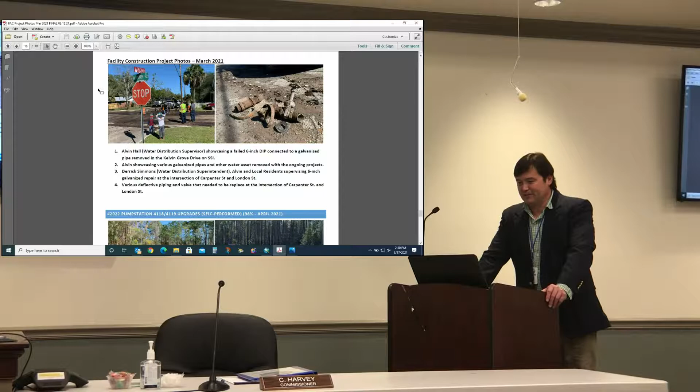It's just another picture there - looks like we've got some inspector trainees there. Yes, inspector trainees. Working here's a family affair, man. Little local assistance, huh? After hour stuff, you have to bring the family along.

Moving along to 118, 119, that was an in-house project done by Systems Pumping and Maintenance. 119 is complete, and 118 is 95% complete. Got a little site work to do, dressing it up a little bit, and have an issue with one of the pumps from the manufacturer. Manufacturer's been down looking at it, trying to determine steps forward, but it's doing a lot better. We added deragger functions to these with VFDs. Previously we were pulling these pumps 2 to 3 times a week, and the ones at 4119 haven't been pulled in over 3 weeks.

So reduction in staff requirements there. Now, are we going to put green barrier on those fences around the pump stations? Like on 17 we have a wood fence. On 118 I think we're not going to do anything since it's back in the woods. 119 currently doesn't have anything, but we could add the green screen fencing if you prefer.

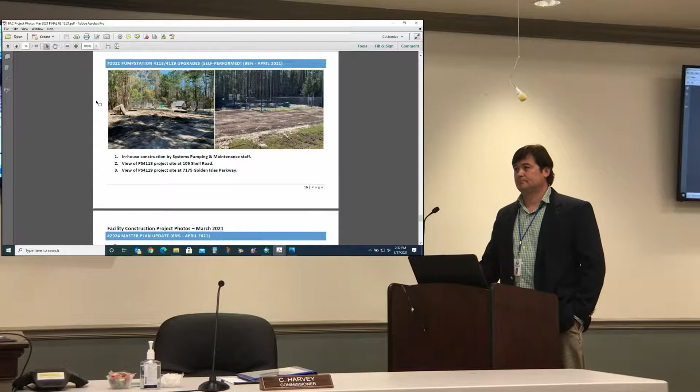I just wonder what we're doing. Do we have a standard now? It's more about location. If it's in a neighborhood, usually we try to tuck it away a little bit. If it's on the side of a major highway, maybe not always.

On 44-8 on 17, I'm not real sure why a wooden fence was chosen there, but it was a preference. It was operations preference—they felt it was easy to repair and stain and keep looking good. I'm not sure it's been stained. It's not looking very good now.

I'm concerned about these being target practice if they're in remote areas. Yeah, our generator out back's got a nice hole in it from when it was at the end of the spur. So we need to think about that. Out of sight, out of mind, is that the idea? Put fencing around it? I don't understand why people do that, but it's awful tempting to some for some reason.

This is the one that blew out—this is the Kelvin Grove blowout, wasn't it? Well, that pipe didn't blow out, this is the valve replacement. When we had a blowout near Bloody Marsh, we went back to try to shut that system off and could not shut it off, so we ended up having to shut down a much larger area. We went back in, dug down, replaced the valve. When we were in there replacing the valve, we had to excavate a bit more pipe than we were expecting, to find something we could actually tie back to. So the valve failed, the 6-inch ductile iron pipe didn't fail. Right, that's correct.

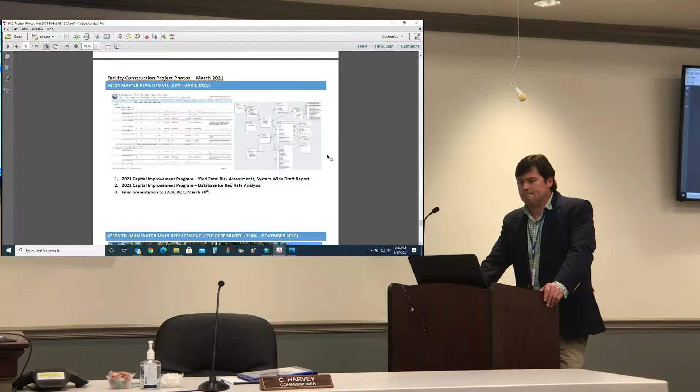Tillman water line replacement, that one is 100% complete, so this will be falling off the list here. And that was replacing a 4-inch with 6-inch or something? It was replacing a 4-inch, connecting 2 sections of 8-inch together, using some of the improvements put in on L Street. That's correct, yes. That's neat.

Meter replacements—as of lunchtime today, we had just crossed the 2,100 meter mark. We've started doing some 1.5 and 2-inch meters, I think we've got about 15 of those done. The vast majority are still 3/4 inch and 1-inch meters. The project's going along very well, and a couple of minor leaks have shown up where things didn't get tightened down all the way during the meter replacement, but they've been working those areas.

We are scheduling for the first of the large meter replacements in early April. We're working with the hospital, they'll be the first meters that get replaced. Out there they have an 8-inch and two 6-inch meters, so we can go ahead and get all 3 of those taken care of in 1 week. But things are going along well there.

We have notified a handful of customers already that when we put the new meters on, they did have a small leak that previously wasn't being detected. So we can call them and tell them they've had continuous usage. A couple of them have argued with us that they did not have a leak, but 30 days later, after getting the bill, they found out they did have a leak. A lot of what's been replaced so far has actually been meters with registers that were not transmitting—the digital registers failed, and you can't manually read a digital register if it's not working, so they've been getting minimum bills.

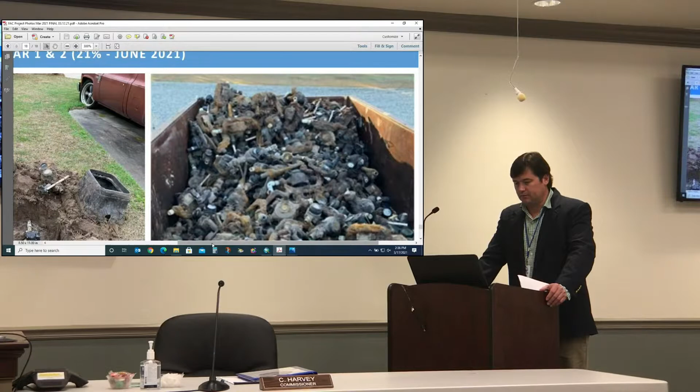Can you zoom in on that picture a little bit, the one on the left? That'd be great. It might pixelate a little bit. Oh, on the left, I'm sorry, yeah. This is much more interesting than the box of scraps. Yeah, that's just a bank, very nice.

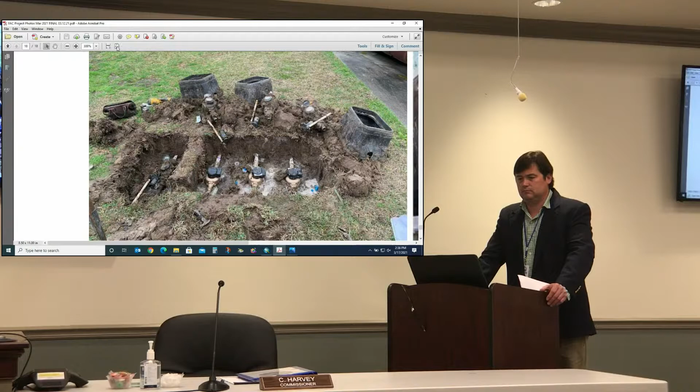One thought that came to mind is, as we're now able to notify our customers sooner if we determine constant usage, we may want to review our policy for leak adjustment, because currently the ones we typically see have had a high bill for two or three months. I think it'd be appropriate for us to revisit that now that we've got much shorter notice we can provide them, and they can engage quicker, which reduces the subsidization we put on the rest of our customers for water consumption that's forgiven, and sewer for that matter.

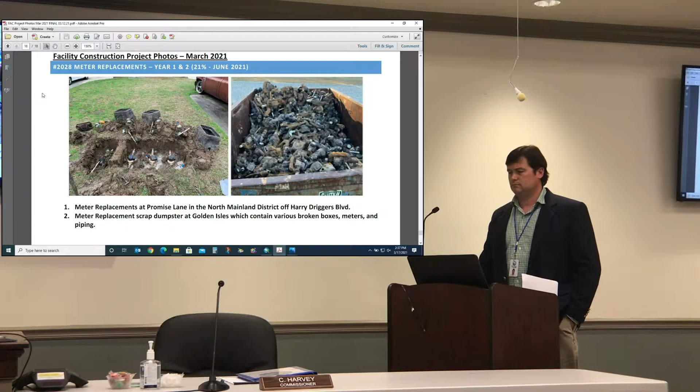And the existing meters, when they ride by and get a different reading than normal, does it alert the guy on the radio read meters? Not until they upload the readings, it goes to the billing system and we get an indication, but that's 30 days worth of usage. I thought radio read meters, if it's different by a certain amount, would flag it so they could go back and read it again. They will do that, but we'd have to go reread them to confirm. We only go by once every 30 days, so if they had a leak that showed up 3 days after the last reading, they've used a lot of water. We'll be able to notify everybody within 24 hours.

60%, something like that? And are the automatic transfer switches, have we awarded that contract? The contract is out for bid right now, expected back, I was going to talk to y'all, but that's due back the Tuesday before the next meeting. Obviously I won't be able to provide preliminary information for a bid due back the day before the meeting, but FEMA would like us to move forward as quickly as possible, so I may be bringing that to you late Tuesday night for review for a Wednesday meeting. And when are we going to be able to take bids on the generators? We're working with our electrical engineer now on speccing all the generators out, so I don't have a date yet. He's got to come down, do site visits, and confirm everything.